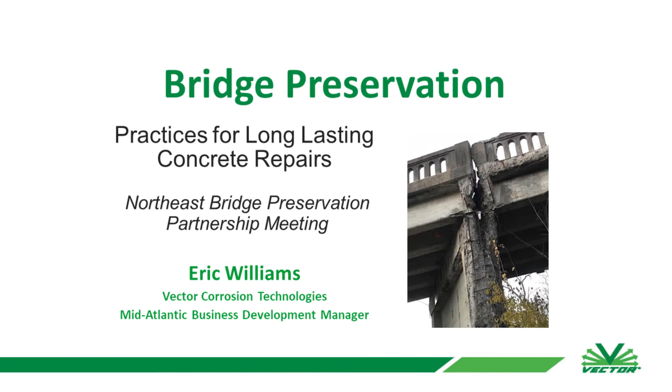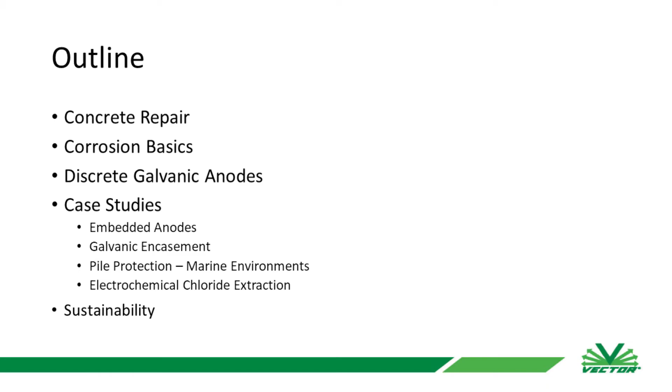Just a quick agenda for what we'll be going over. We'll do a little bit on concrete repair, going over some corrosion basics, discrete galvanic anodes, what are they, why do we use them, and then proceed to go through a couple of case studies and examples, wrapping up with some sustainability practices that we support.

Current state of repair - I don't think I have to tell everyone in this room about how much corrosion issues face, and it's pretty much the leading issue that our nation's infrastructure is facing. It's estimated about 18 to 21 billion dollars in corrosion issues throughout our nation's infrastructure. I always like this last point, stating that about 50% of the repairs that are done are actually lasting to their full life and capability, which is a nice way to say that 50% of repairs are actually failing before they reach their life.

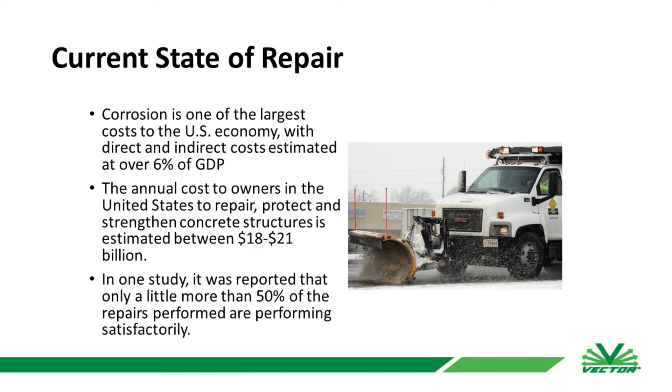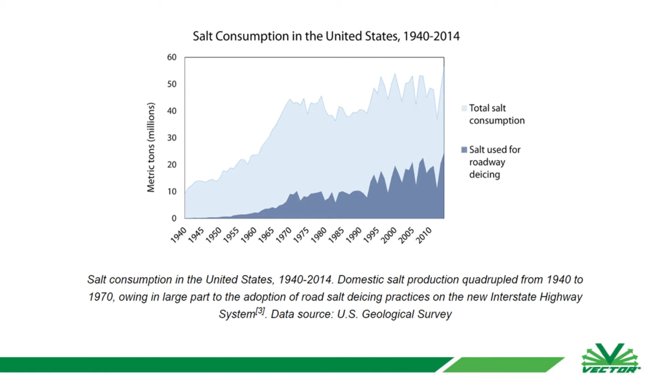One of the biggest issues we see, and the reason for that, is the roadway salt being used throughout the country. You can see right where the late 60s, early 70s, where our nation's infrastructure was really being built up and a lot of our nation's bridges were being built, the salt consumption and the salts being inundated have jumped significantly, even around the late 90s, early 2000s. So a lot of these structures are being inundated with chlorides and salt, especially here in the Northeast where our winters can get pretty rough, and we're constantly putting these down.

Just some pictures where I'm sure a lot of you are familiar with some of these photos - a lot of concrete deterioration and corrosion issues due to the ingress of chloride throughout.

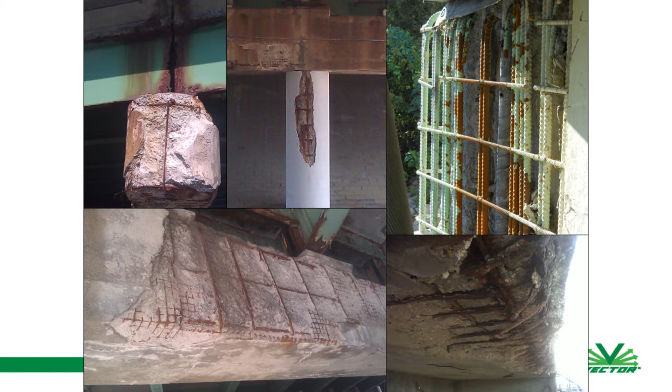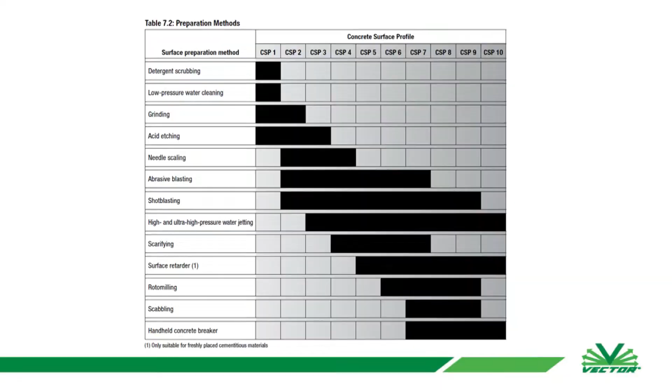A couple of examples here is your surface preparation. This is through the ICRI, so you can actually go through and they'll give you these specific little tablets that show you how you're supposed to exactly have your concrete surface prepared for whatever type of repair you're doing. So if you're specifying, hey, this needs a surface profile of a 6 or a 7, well what does that actually mean? You can give a physical photo of that for whoever is going to be doing the repair, which some people really appreciate.

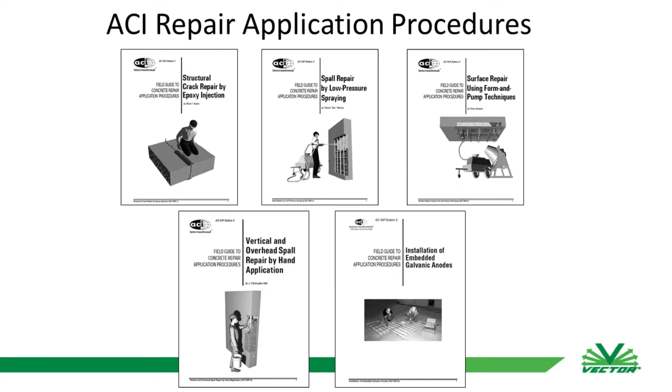ACI has a lot of different codes. I know ACI Repair Code 562 is one of the repair codes that's been used not only in buildings, but some owners and DOTs have started to bring that on as well. So there's a number of different types of codes and resources in some of these memberships that you can take advantage of.

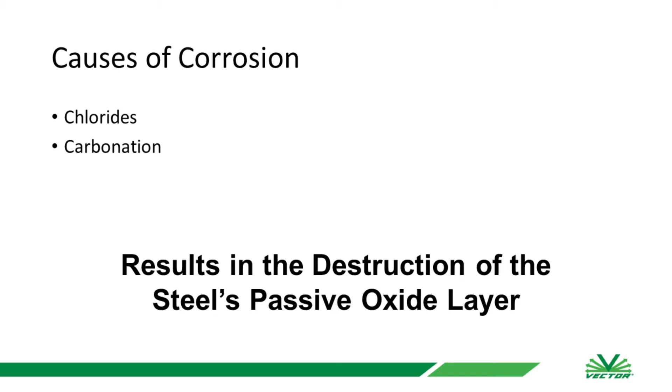Hopping right into corrosion and where is it coming from. Chlorides, obviously, we know marine environments, de-icing salts, some chemical plant issues that we see. Carbonation of concrete is the same kind of concept as chlorides, except carbon dioxide is dropping the pH level of our concrete, moving it more towards an acidic base, which starts a corrosion cell as well.

Typically we're seeing those in much older structures or anything with low concrete cover, you'll see carbonation of concrete. What it really comes down to is both of those will break down that natural passive oxide layer surrounding steel when it's in concrete, and that's going to cause our corrosion issues.

So I went over sources of chlorides. I think we're all pretty familiar with those. One of the big takeaways from this slide is chlorides are never consumed. Once they're in your structure, they're always going to be there unless we remove them in some way, shape, or form. Even by covering them up, they're still going to be in there causing issues for our reinforcing steel.

This is a corrosion cell. I always like to review this because this is what all of the galvanic principles we'll be talking about are based off of. This is what's happening when you have corrosion, chlorides, or carbonation coming down to your reinforcing steel, breaking down that natural passive oxide layer that naturally surrounds steel when it's in concrete.

We talk in terms of electronegativity when we're talking about corrosion, because what is steel corroding, right? It's just an iron ore that we placed a lot of energy into, and then that energy is being given off and reverting back to an iron ore. So that energy is being given off in the form of electrons, and when electrons are given off, those are negatively charged. As that area starts to corrode, it's called an anode.

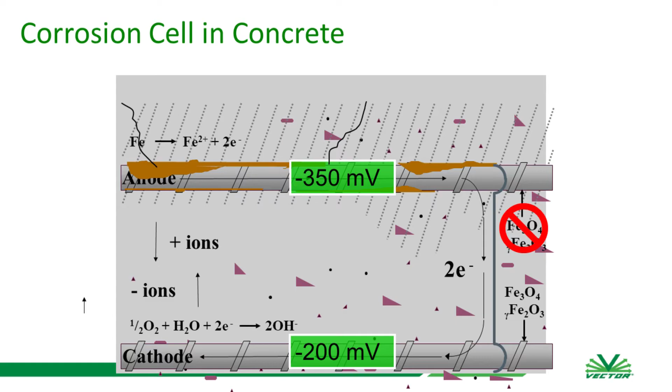And then a cathode will form, or a cathodic area. The cathodic area will accept those electrons, and then hydroxyl ions will go back and forth between some type of electrolyte. In concrete, that's our electrolyte. If we were working in pipelines, the soil would act as our electrolyte. In marine environments, the water. Those hydroxyl ions go back and forth, then you get Fe2O3, or rust byproduct, or corrosion byproduct that forms around your steel. And that's what can expand up to 10 times its natural size, and that's where you're getting your cracking, your spalling, all those nasty things that happen to our structures.

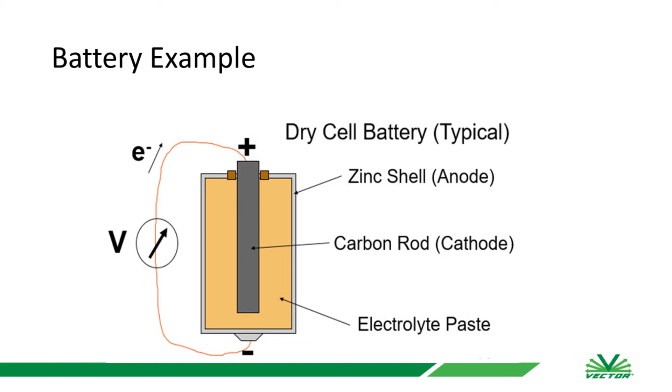Essentially what you're looking at is the same electrochemical process that's in a battery. You have your carbon rod on the inside, your zinc shell on the outside, you're putting it into whatever device you're putting it into, and that carries that current and causes the device to work.

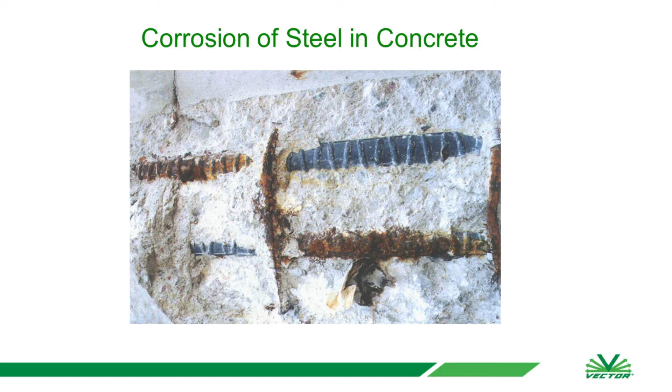I always like this picture. It's a great picture, this is a patch that we opened up. We didn't do anything, we didn't clean the bar on the right or the bottom left. Really all it is, is a great illustration of here's your anodic area here where you're having your corrosion issues, and then here's your cathodic area right next to it. So you have a real good illustration of showing where your issue is in terms of corrosion, and then what's actually technically being protected by that area of corrosion is the adjacent bar right next to it.

Patch accelerated corrosion, or halo effect, ring effect. I don't know if a lot of you are familiar with this, but when you're looking in terms of corrosive activity, say we had a patch right here, and then the next thing you know, you have a patch starting next to it, and next to it, and so on and so forth. What's happening is when you're doing your patch repair, you could be doing everything correctly, right? You're milling down, or taking out the bad concrete, putting in a good material that's bonded well, all those things. What happens is essentially you passivate the steel in that patched area.

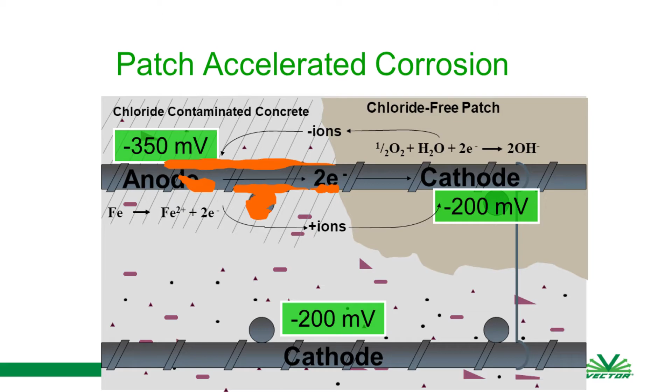So in that patched area, you're back down to a nice passive state where steel wants to be about negative 200 millivolts in that state. The surrounding areas, if they're still more electronegative due to chloride contamination or carbonated concrete, whatever the case may be, that potential difference between that area within your patch and the area outside of it, you have essentially flipped your anodic and your cathodic site. So what that's going to do is start the whole process over again, and that's where you get that ring or halo effect. That's what's causing it.

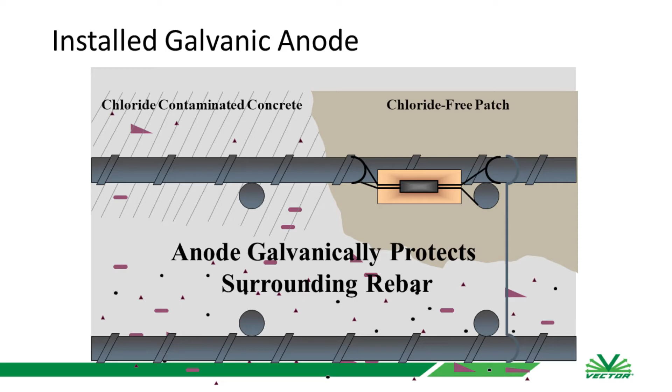One way that we help prevent against that ring or halo effect is the use of galvanic anodes. Galvanic anodes, the ones that we use, you're going to be using zinc. Zinc is much more electronegative than reinforcing steel. So anytime you put two dissimilar metals together, the more active metal will corrode first, rather than the corrosion happening at the more noble metal.

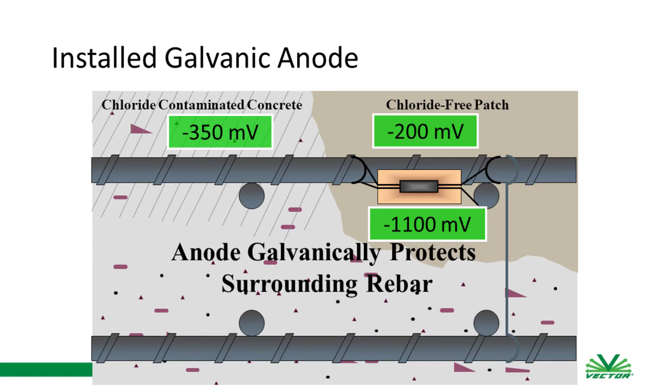So by tying on these galvanic anodes, they're zinc cores with a high pH mortar around them to keep the zinc active, and then that'll help not only protect your reinforcing steel within your patch, but all that surrounding contaminated concrete that's more electronegative. So that's going to help stop or prevent that ring or halo effect you may have seen in some of your repairs.

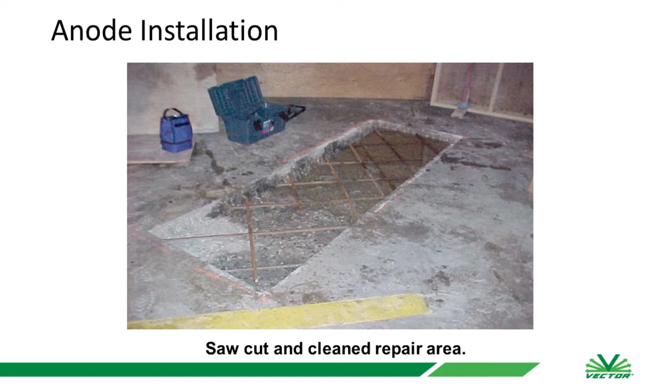They're pretty simple and straightforward to install. Like we talked about earlier, you want good square, clean saw cuts, nice clean reinforcing steel. You do need steel-to-steel connection for these to work. So you'll literally be tying them directly onto your reinforcing steel like this. And you want to test not only that you have a good connection from your anode to your reinforcing steel, but also these bars over here, you want them to be continuous or touching in some way, shape, or form as well.

Because that's going to allow the current to go from this galvanic anode here, not only to this surrounding steel, but it'll travel down these bars as well and protect the steel up here. Pretty simple to test for.

You get a multimeter, you can put it on ohms or millivolts, and you just want to see 1 ohm of resistance or less, or 1 millivolt or less, and you know you have a good connection. If these bars weren't touching for whatever reason, there was a space, whatever, you could take a rebar tie or something like that, tie them around, make them electrically continuous, and move forward.

Again, you want these anodes around the perimeter of a patch. You want to protect that interface between old and new material. I always like to point out as well,

for these galvanic anodes, these aren't going to provide structural protection all over, the ones I'm speaking about here. You're really going to get that perimeter of the area around your patch where you're going to get most of your protection. If you had another element or another lane down here, it's not going to do anything down there. Zinc can only throw current so far when it's in concrete.

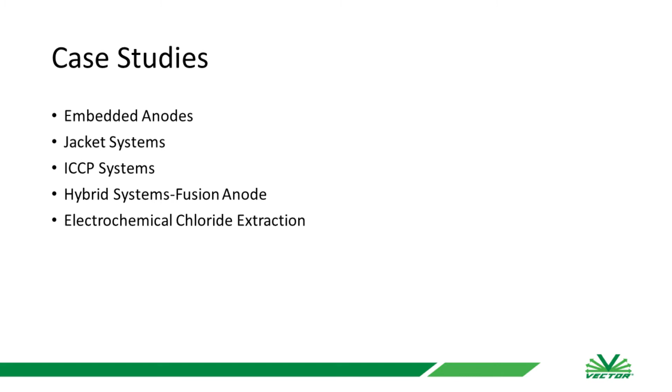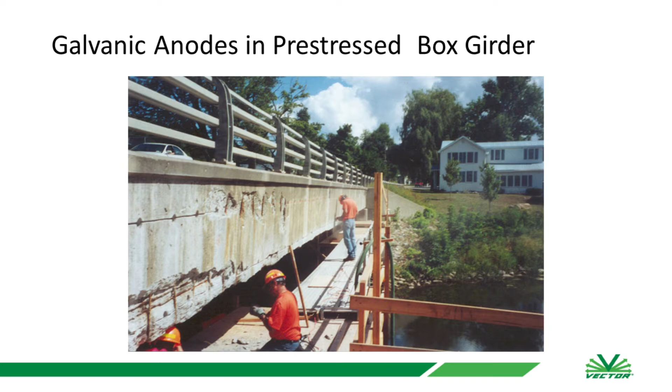A couple case studies where we've used some of these different galvanic and impressed current cathodic protection solutions. This is some of the galvanic anodes in a pre-stressed box girder, where obviously they had some drainage issues. I believe that really what was happening is water was just coming down and pretty much eating away the face of that girder.

And this was, I believe, in upstate New York, where they were trying to get another about 15 to 20 years out of this bridge, because if they didn't, I think the detour was about 25 miles, which would have been really crappy for this guy right here.

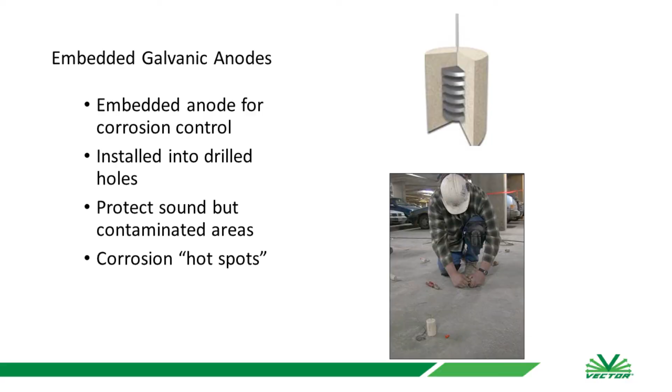So our solution for them and to help them out was our drilled-in galvanic anodes. Rather than having to open up an entire patch and get rid of all this concrete, literally what they're going to do is core into specific areas where they want to target corrosion protection and run them in a series and attach them that way.

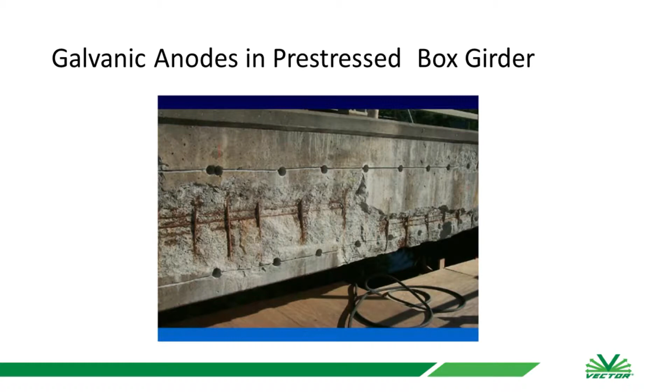You can see here are the drilled holes where they put in these type of anodes for the protection of the steel, and then they're just going to do a saw cut in between them. Between that saw cut, they'll lay wire and attach each one of these anodes individually.

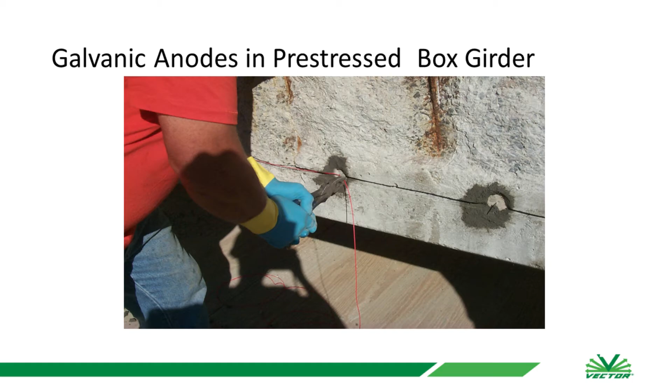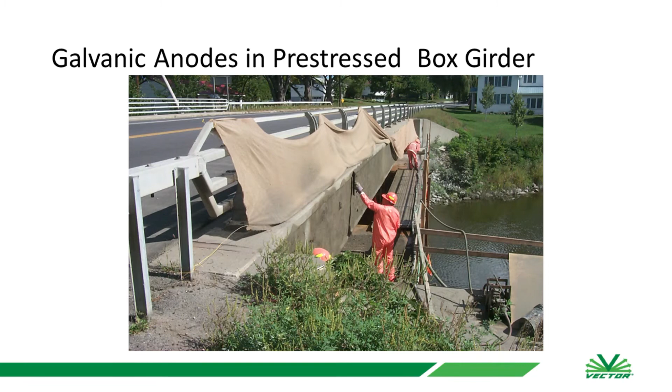So you do need a steel-to-steel attachment for these to work, but you can attach them at one end of the series and another at the other end for redundancy, because if we lose one connection, then we have a whole string of anodes not doing anything. All they do then is grout everything over, and that's what it looked like when it was completed.

Really nice that for these galvanic solutions, you do not have to monitor them. There's no maintenance that's required. You can kind of put them in there, set them, and forget about them.

You can see here they did want to monitor these, so they did put in some monitoring boxes so you can easily go up. Anybody from either the engineer or ourselves or the DOT can go up and say, okay, these are still throwing current, we know that they're still working, and move on. But again, they're pretty simple to monitor, but you don't have to. Which is one of the nice benefits of using galvanic protection.

Galvanic encasements, this is more we talked about for targeted protection for drilled-in type anodes. Maybe we just have some isolated areas we have to protect, but what if we have entire structural elements?

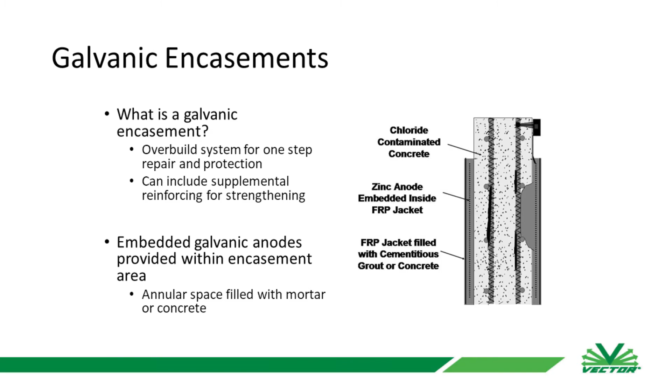And that's what pretty much we do with galvanic encasement. You're doing maybe an overbuild or milling down to the face or getting to the reinforcing steel and protecting larger elements of the concrete. So in here you're looking at different columns that we've done it.

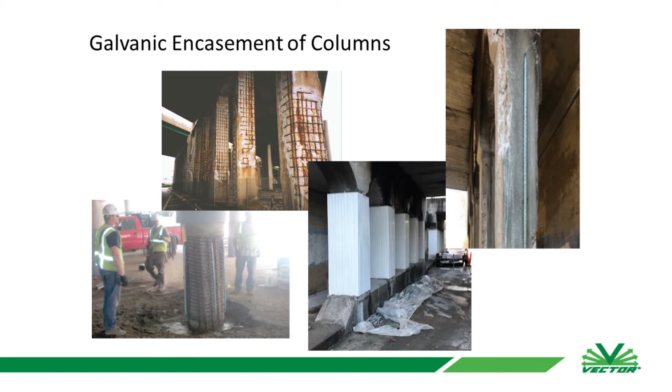Some of these have been pretty rough shape. You can also use it in a concrete jacket, or in this case they decided to put PVC forms around the galvanic anodes or the galvanic encasement to help protect it as well. So a couple different options you have there in terms of protection.

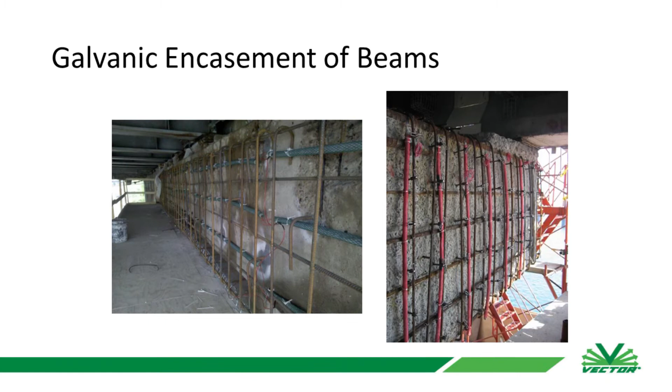Encasement of beams, a lot of substructure elements we've done with these types of galvanic encasements. I don't know if anyone gets into a lot of accelerated bridge construction or rapid bridge replacement, but that's where these type of anodes really come into play, because you can match the life of what you just did up top and having to replace a deck to maybe the substructure below, and you can match the life of that bridge up.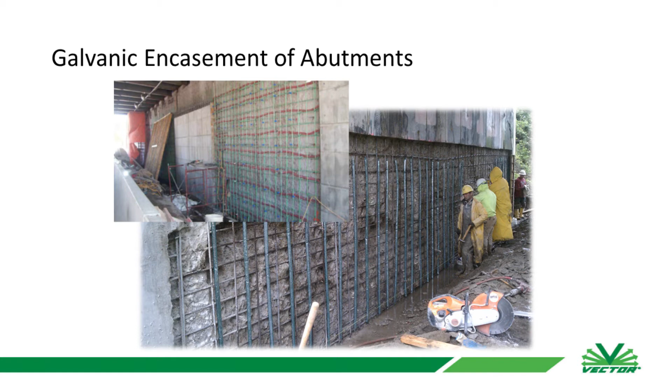Some more where we've done them in some abutments. There's a good illustration here of where we've done some projects in Ohio where they were going to do an overbuild. They tied in some new epoxy coated rebar and then placed the galvanic anodes on that new cage of rebar, and then they will tie all those galvanic anodes back into the existing reinforcing steel.

So this is a good illustration of it here. You can see the anodes, or the encasement, is these long red type anodes, and then the new cage of rebar. You can see that they have everything wired back into the existing reinforcing steel, because again, that's what they're trying to protect. It's hard to see from this photo, but then they ran some wire up and we've been monitoring these ever since.

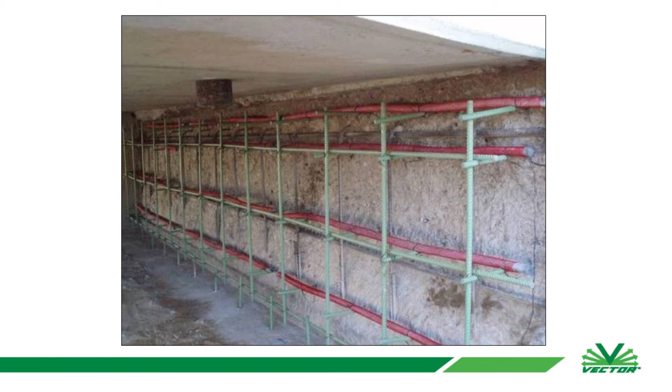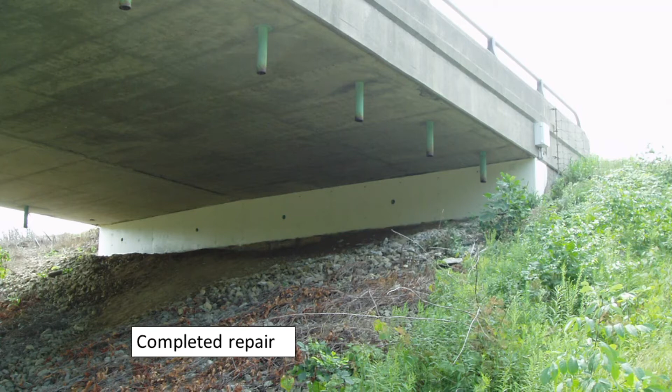We thought initially, this was our first project we did with these back in 2005. We estimated that we'd probably get about 20 or so years out of it, and it looks like it's going to be closer to 30, 35 years for the life of these anodes. That's what it looked like when it was completed. So we've been monitoring it, working with the DOT that we've done this with, and they're still throwing current and working pretty well over time.

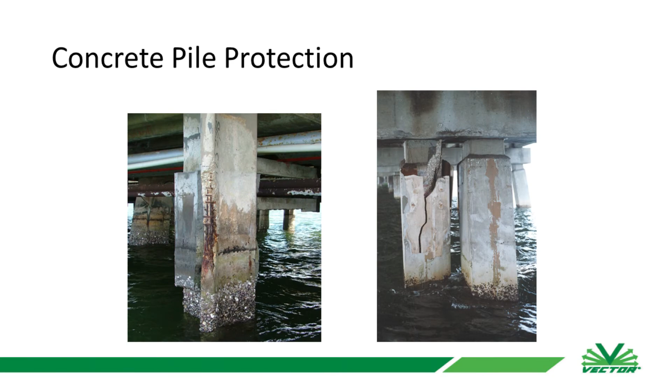So moving on along to some of the marine environments, and similar to what we talked about, instead of encasement though, they're more doing pile jackets. There's several different types depending on where you are and how much protection you need. So there's zinc mesh jackets that require salt water.

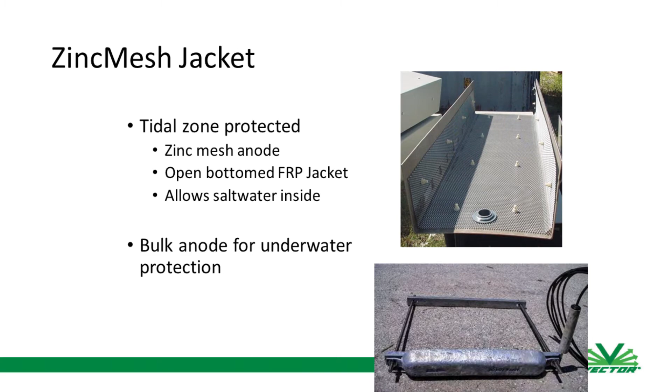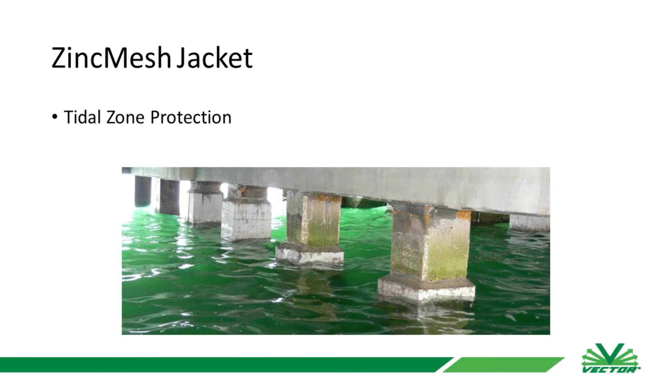It needs to keep this zinc active, so you'll put some stay-in-place forms, attach the zinc, put some stay-in-place forms around it, and allow that salt water to seep up and keep that zinc active. These are more for just tidal zone protection, because that salt water can only leach so far up or seep so far up into the concrete. For zinc mesh, that's kind of the tidal area, or the tidal zone, is what we're looking at.

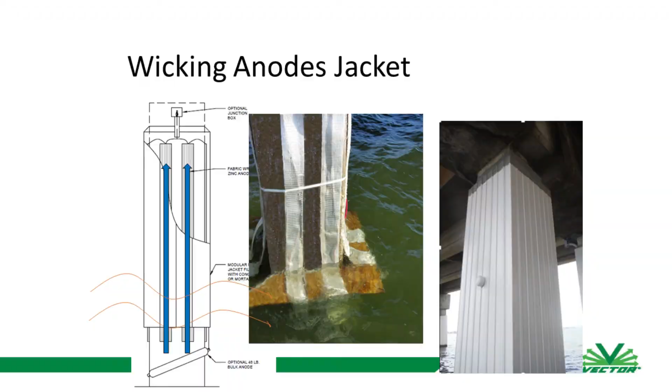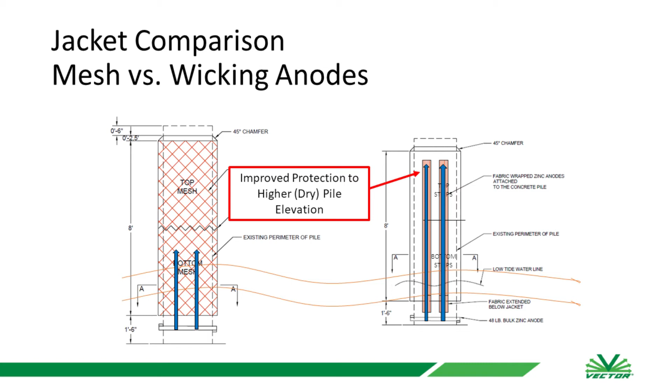If we needed higher protection, we are able to do that, but you're going to look at using a wicking anode, is what we call it. So there's a fabric around a zinc core. Same concept as the zinc mesh jackets, where you're using salt water to keep it active, but it works kind of like an old school lantern, where it's going to soak up that salt water at a higher elevation, so you're getting higher protection. This will help if you have some atmospheric chlorides or things like that at a higher elevation along your pile, where it's going to help protect that, keep it intact.

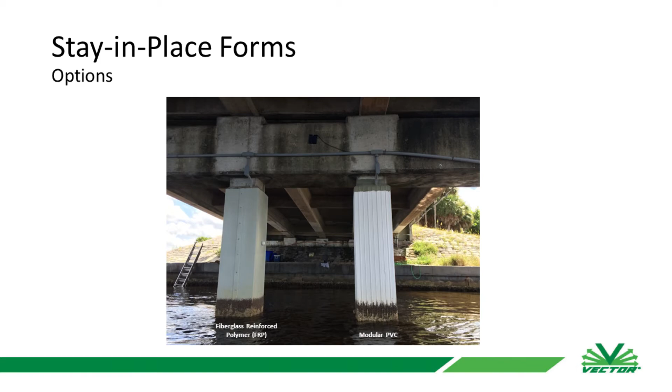There's also some different options for the forms themselves. I know in the past we've used a lot of fiberglass. One thing that we've been offering out there now is PVC. The contractors and people that we've worked with really like using the PVC. They snap together really easily in the field, and they're easy to maneuver and work with. They ship a lot easier as well, so the contractors are really appreciative of that. They also have some bonding advantages as well. They work really well, they're a little less expensive, and we've been getting some good feedback. But you can still use either one, just depending on the need for the project.

And then last but not least, for marine environments is, well, we talked about saltwater environments, the saltwater keeping the zinc or the anodes active.

Well, what if we're in brackish water, fresh water, or even dry land? In those cases, we have self-activated marine anodes where you don't need any salt water. I'm working on a project with Virginia right now where they're worried about zinc contamination because of baby oyster beds. They decided they didn't want any zinc in contact with the water, so they chose a self-activated type jacket to keep zinc out of the water and stop environmental concerns.

And down below, I failed to mention bulk anodes. You can attach those at the bottom around your mud line, which will help protect and stop corrosion for underwater issues.

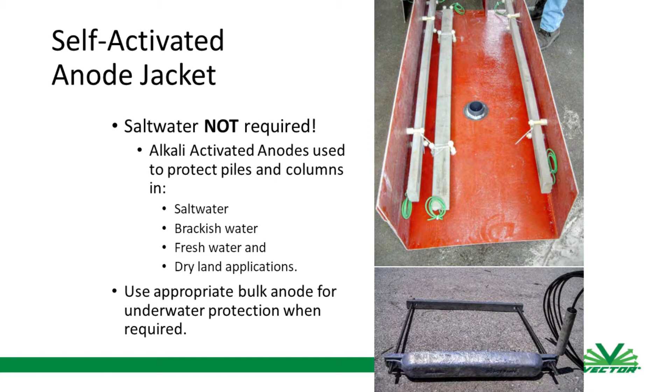Here's an example of a project we did in Florida, where they used a number of these self-activated jackets throughout the splash zone areas. So it's not constantly inundated, but enough to keep it activated through salt water. Self-activated works well for this type of application.

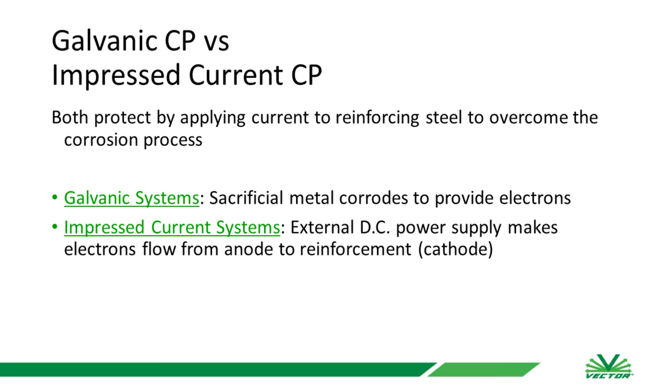Everything we've talked about so far has been geared toward galvanic protection, the use of dissimilar metals, one corroding first to sacrifice itself versus the other. This one, though, is impressed current cathodic protection, or ICCP, which works really well for something you want to last a really long time.

The reason we use some of the anodes we do, you can see we have some MMO, mixed metal oxides, as well as titanium ribbon and titanium mesh. The anode technically corrodes, but it takes a really long time, so you can get really long life out of impressed current.

Now, some people I've spoken with have had bad experiences with impressed current, mainly because it has to be monitored and maintained. If the owner wants to use impressed current, we would never recommend using it without some type of monitoring or maintenance to go along with it.

The nice part is we can do that remotely now, putting modems and data loggers into rectifier cabinets, so you're alerted if power goes out, it gets struck by lightning, a wire gets cut, or someone just turns the power off without knowing what it is, leaving no power going to their system. So impressed current works really well, but it has to be monitored and maintained to make sure those electrical components have current going to the system.

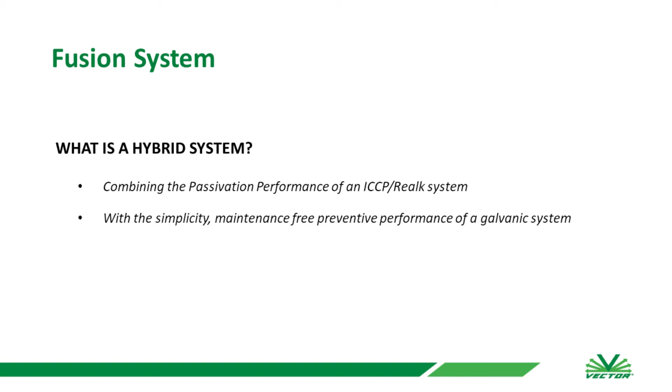The next evolution of the impressed current system, after covering what's galvanic and what's impressed current, is using a hybrid or fusion type system combining both. So what this is, is a combination of not only an impressed current system, but a galvanic system all in one.

A fusion or hybrid system has its own self-contained impressed current cathodic protection in the anode itself. Phase one shoots a lot of current quickly in order to passivate the steel, putting it into that non-corroding state. It doesn't require an outside power source or anything like that; it's all contained within the anode.

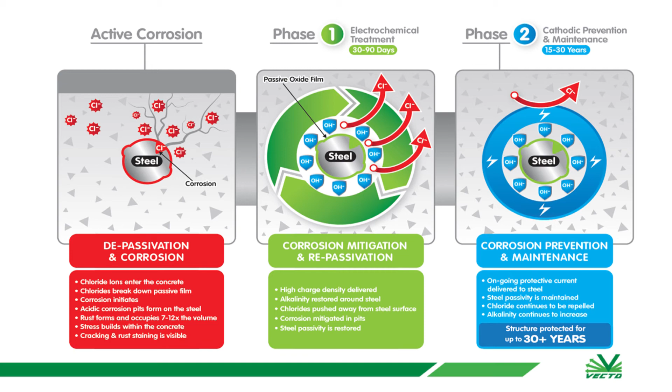As that first stage of the anode runs and passivates the steel, it automatically switches over to the second part, the galvanic piece, similar to the anodes we talked about earlier. So you get the benefits of both worlds: impressed current where you can control the amount of current going to the steel initially, and then the maintenance-free capabilities of a galvanic system down the road.

Here's what it looks like. It looks very similar to the targeted protection anodes, or the drilled-in type cored anodes that we use.

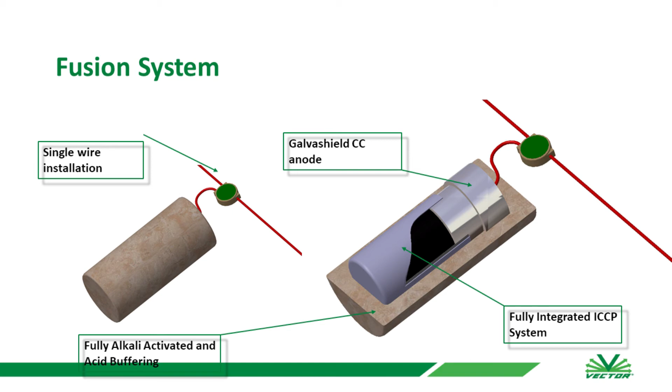One of the projects we're doing this on right now is the Arlington Memorial Bridge in Washington, D.C., the bridge that connects Arlington National Cemetery to the Lincoln Memorial. When they first started looking at this project, they wanted an impressed current cathodic protection system throughout the whole bridge. They got a couple of estimates, and FHWA, or Federal Lands, came back and asked if there was anything else they could do. We came back to them, and this was our solution for them.

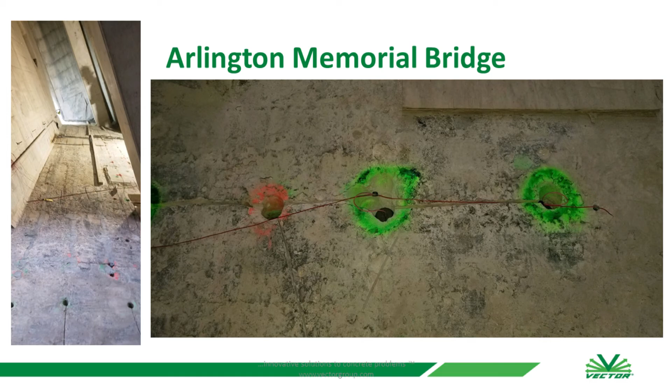So you can see here where we went through, rather than having to do a global system throughout the whole structure, you're going through and targeting specific areas where you have corrosive activity, putting in these type of anodes. They monitor sections of them, but again, you don't need outside power sources or continuous monitoring. They pretty much work on their own.

Last but not least, if you have a structure where you really don't want to change the aesthetics to it, maybe it's historic in nature and you want to keep it intact, one of the things we've done to help extend the life of these types of structures is electrochemical chloride extraction. Essentially, it's an impressed current system on steroids where you're running a lot of current through the steel in order to literally extract the chlorides and reset the life of the concrete.

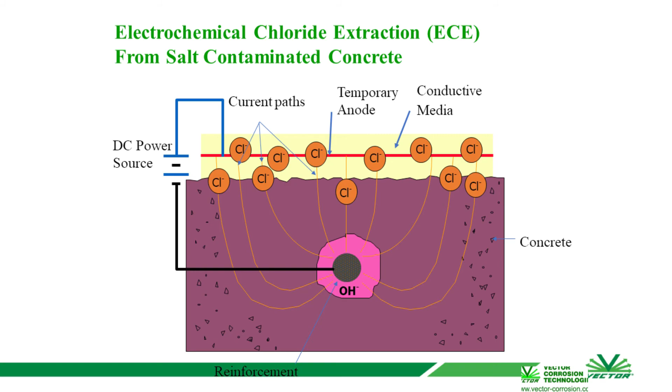What you do is set up a temporary anode on the outside of the structure. We usually use a welded wire mesh, and then you're blowing in some type of conductive media or temporary electrolyte to help the current go from your structure to your temporary anode on the outside. You'll hook up a direct DC power source, so your positive goes to your anode and your negative to your reinforcing steel.

As that negative current is charging and going into your reinforcing steel, chlorides are negatively charged ions. So it's actually going to sit there and pump that current throughout the steel where you have it and push it to that temporary anode on the outside, extracting the chlorides. What that's going to do is not only extract the chlorides out of your structure, but raise the pH level of your concrete back up to an acceptable level, and that natural passive oxide layer is going to be restored around your steel. So it's almost why we say it's kind of like resetting the life of the concrete for your structure.

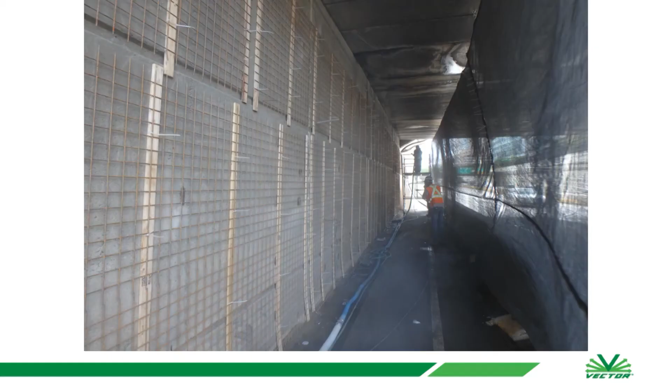You can see here what it looks like when the welded wire mesh is installed. This is an example of them blowing in that temporary electrolyte to help carry the current from the structure to the temporary anode. You wrap everything up, keep it moist. That helps with the conductivity of the current, as well as people like that things don't catch on fire. They zone and subzone everything out, making sure everything is monitored constantly through clamp meters and things like that.

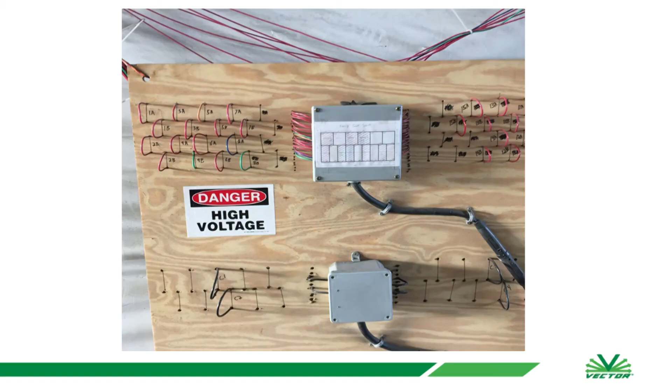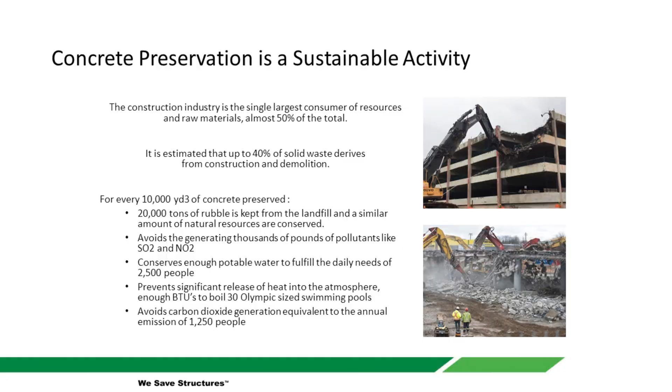A lot of things go into construction, raw materials and the use of everything that goes into it. About 40% of solid waste comes from construction and demolition. For every 10,000 cubic yards of concrete that we save, we can keep a lot of stuff out of landfills.

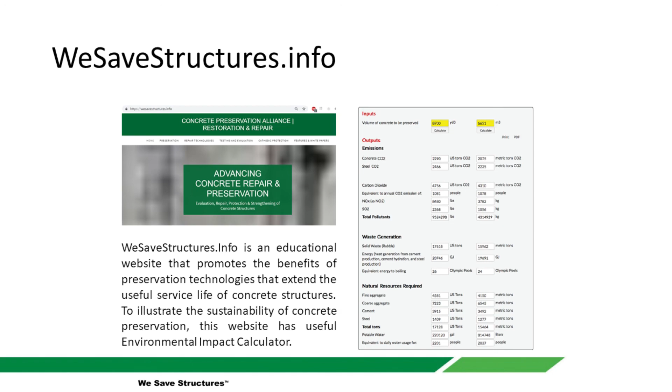One of the things we've partnered with is a website that we're part of, an alliance with other different companies, called wesavestructures.info. On here, it's actually an environmental impact calculator where if you put in the amount of cubic yards — and for our Canadian friends, we always have the metric there as well — the amount you're actually going to be saving by doing some type of rehabilitation, it'll spit out all of this information showing you the impact that you're having.

I know some people who have kept this within some of their presentations or proposals to show not only that they're doing the right thing from an engineering standpoint, but also the right thing from an environmental standpoint as well. Open it up for any questions. Appreciate it.